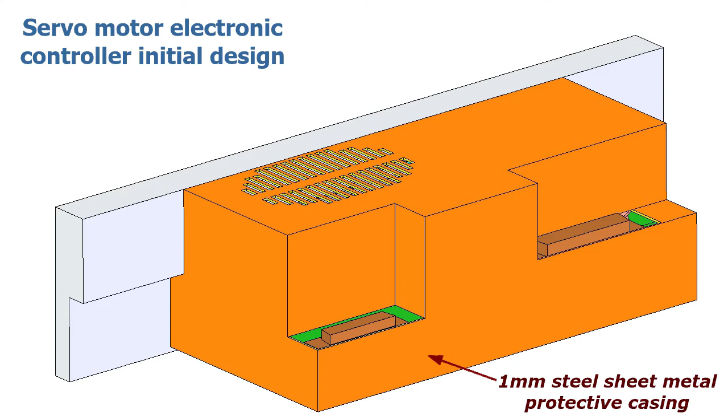The orange protective casing is made of 1mm gauge steel and has air vents on the top and the lower surfaces. In this already simplified model, the two green colored circuit boards, or PCBs for short, are fixed to an aluminum block which acts as a cooler and has mounting points to fix the controller to the mainframe of the machine it is originally built in.

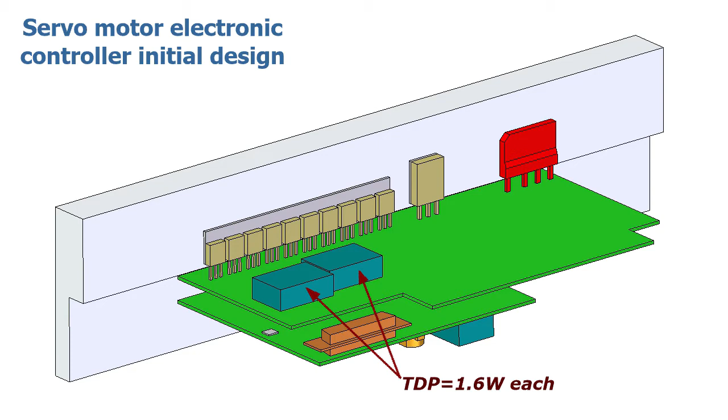As you can see, not all components of the controller work at the same time, but these are the ones that add up the most severe load case. In an electronic thermal management simulation, the key design figure is the heat dissipated by the components, also known as thermal design power, or TDP. This heat has to be removed from the component to keep it below the maximum operating temperature to ensure long life and reliability.

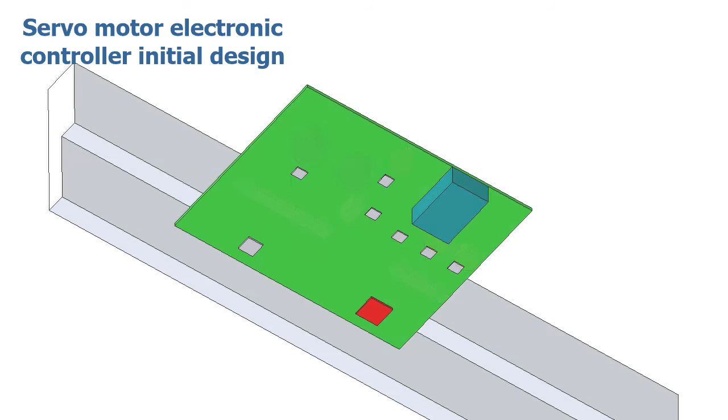No worries if you as a thermal simulation guy don't know the name of all thingies on the PCB or how they work. I don't know all of them in this control unit either. All you need to be aware of are the TDPs and what material each component is made of. For the moment, that's enough.

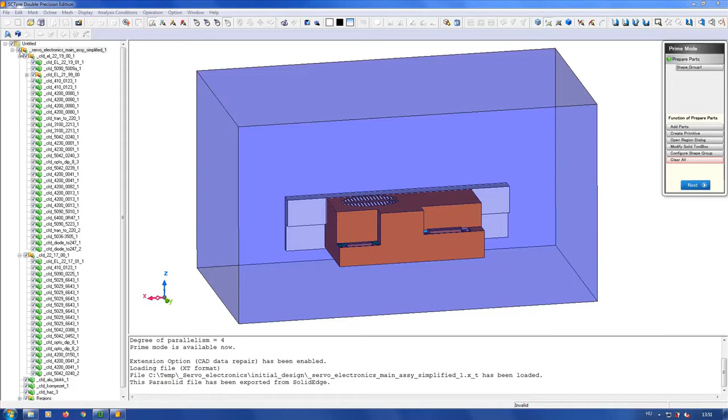Let's prepare the model. The blue box is the air surrounding the controller, and it's an important part of the design because the controller unit works in a quite small compartment without any vents. To make the orange casing suitable for a nice SC Tetra feature, I'm turning the solid parts within SC Tetra preprocessor into a surface model by deleting the internal faces. It would take loads of tiny mesh elements to build the 1mm thick metal, so instead I'm using its outer surface and apply a software feature later on.

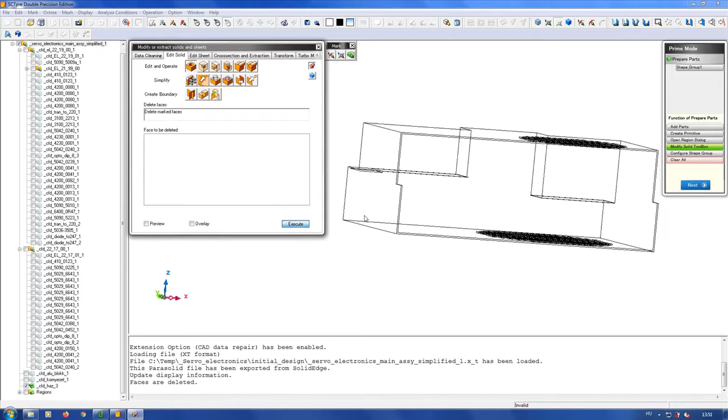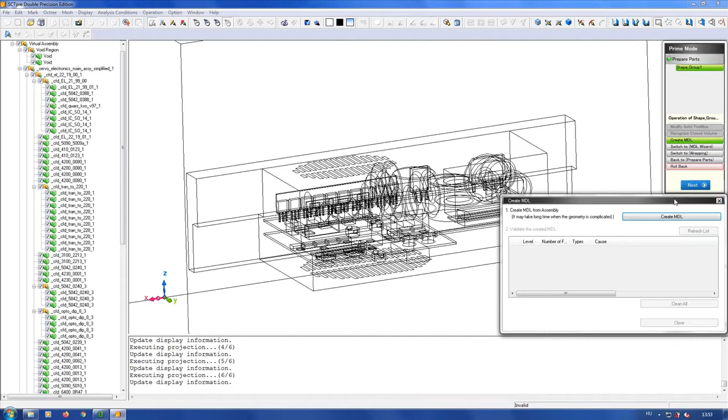When it's done, I'm telling SCT to recognize all solid volumes. This will give us the list of all components with their names, which comes handy in the simulation for assigning TDPs. This is the point when SC Tetra cleans CAD geometry. It automatically fills closed cavities and removes overlaps. Final step of preparation is called tessellation. This means that the parasolid model is converted into one that uses triangle surfaces only. I'm giving it a name, save it and load it for further processing.

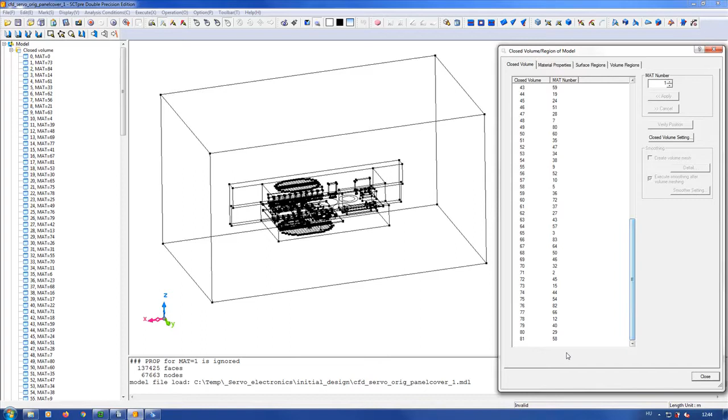At this point comes a little challenge. As you can see, SCT has recognized 81 closed volumes, and this is already a simplified geometry. Additionally, most of the volume region names are part codes the designer used, so they don't really tell me anything about which part is which. It's a challenge because each part has to be given one of the 9 material properties this unit uses.

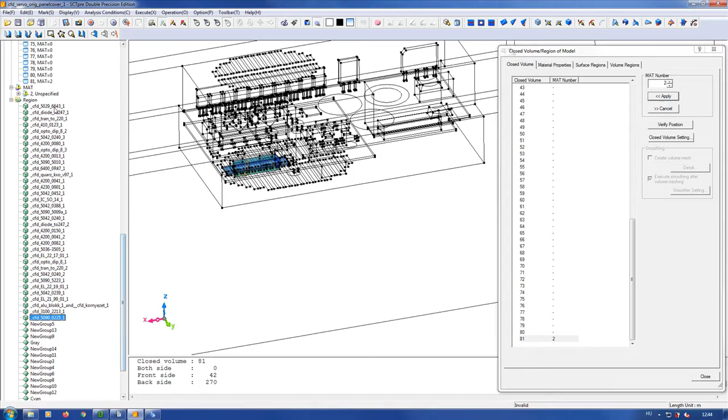I double-click on the volume region name so SCT marks the parts. Next, I make SCT display the volume number of the marked region in the message window at the bottom. For this plug, it's 81. So I go and find 81 in region registration on the right and assign material number 2, which is going to be steel later on. The next region name has 8 microchips in it, so I get their volume number listed, find them in region registration and assign mat number 6, which represents silicon. This way I can assign the right material number to all 81 parts in 10 minutes. I will get back to you when I'm done.

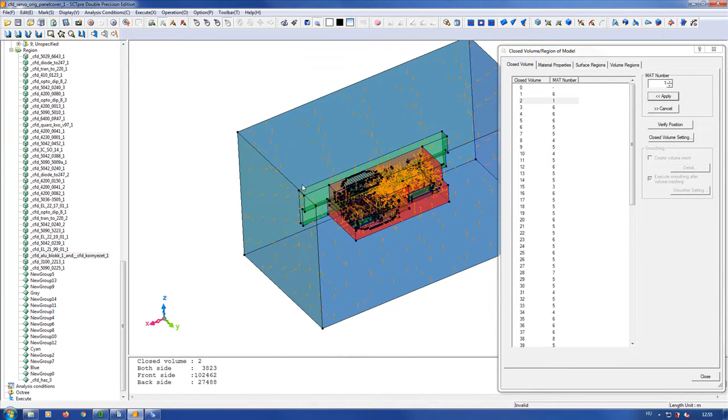As the mat number assignment goes on, it gets easier to find the region number in the registration window, so it's not that bad. If you have a quicker way of doing it in SC Tetra, just let me know.

Let's move on to materials. Out of the 9 different materials, first is convective air to simulate natural convection. Solid parts have steel, aluminum, ferrite, polystyrene materials with constant thermal property values. But silicon, which is the most interesting one for electronics applications, has temperature varying specific heat and conductivity. Apart from these, I will use copper as heat bridge between the aluminum block and parts attached to it, and finally I set printed circuit board materials that have anisotropic conductivity depending on layer orientation.

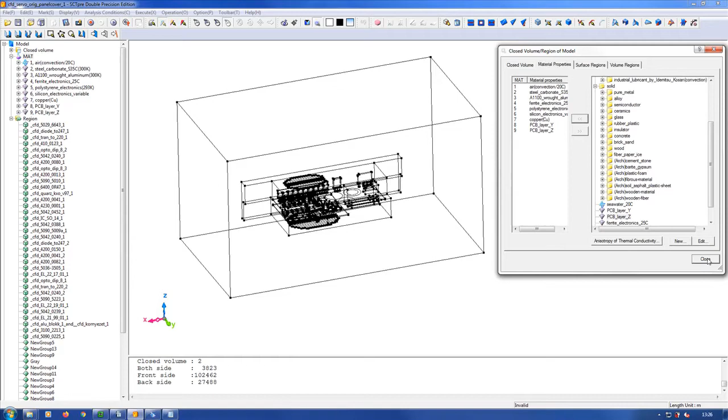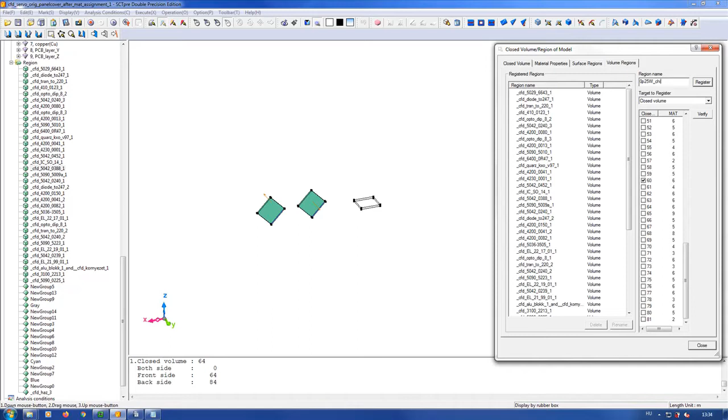Now that I have assigned materials to part groups, the next step is to sort out those individual parts that have heat energy release. As I mentioned earlier, not all the parts work all the time, so I have to find and name those that are on in this load case. I'm using the same workflow as with the material number assignment. I'm marking the part group by clicking on its name, I'm asking for the volume number, and in volume registration I give the volume a name that I finally understand, based on TDP figure and location in the unit.

It takes roughly 10 minutes to find all the parts and properly name them, so I get back to you when I'm done. This is the last silicon chip I'm naming on the upper side of the small board. Its TDP is 0.25 watts.

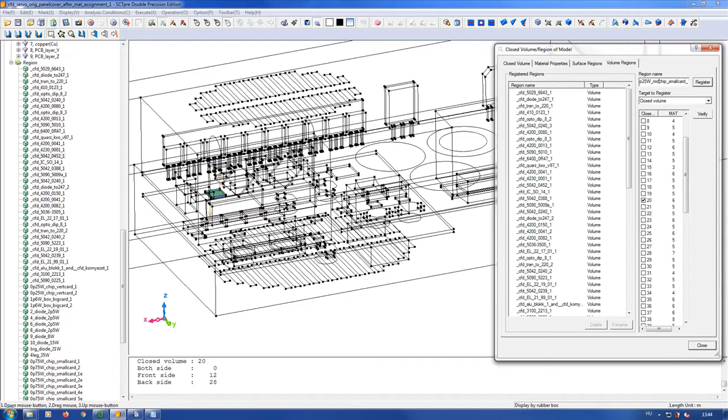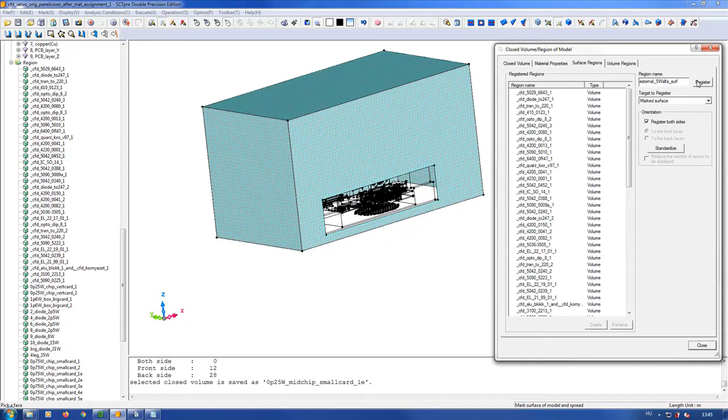Right, I'm done with naming volume regions, but I also need some surfaces of the air compartment to set heat transfer conditions later on. I'm registering top and side surfaces as a group, the bottom surface separately, and finally the outer surface of the aluminum cooling block.

Let's move on to analysis settings and boundary conditions. I'm using laminar flow and switching temperature simulation on. I'm also turning the heat conduction panel feature on, which will allow me to use the surface model of the steel casing. Next, I'm setting 500 iterations and turning gravity on.

Now the heat conduction panel. This is the cool feature I mentioned earlier that saves me a lot of mesh elements. To do this, I'm choosing casing model surface region, giving it 1 mm thickness, and I'm choosing steel as material.

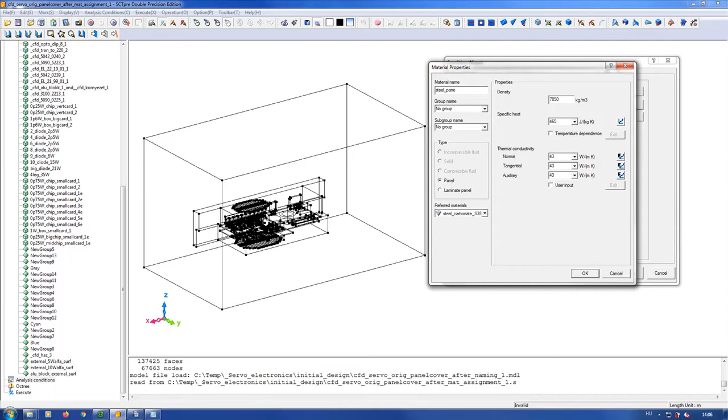Initial condition is 25 degrees C temperature for all materials. Default boundary conditions set up the simulation in general, which saves me some time, and I can further refine boundary conditions in the next step, which deals with surfaces.

I'm setting wall heat transfer coefficient to those surfaces of the closed compartment which are in touch with the environment. The ones surrounded by air get 5 watts per square meter Kelvin at 25 degrees outside temperature, while the bottom that touches another metallic surface gets 10 watts per square meter Kelvin.

Moving on to heat sources, I'm first setting the condition at the outside surface of the aluminum cooling block. It is mounted to the steel frame of the machine, so I'm setting 50 watts per square meter Kelvin at 25 degrees C, which is lower than the expected component temperature, so heat will be removed.

After all this, I'm setting TDPs to volume parts. Their names tell me what TDP I should use, so this goes quite fast.

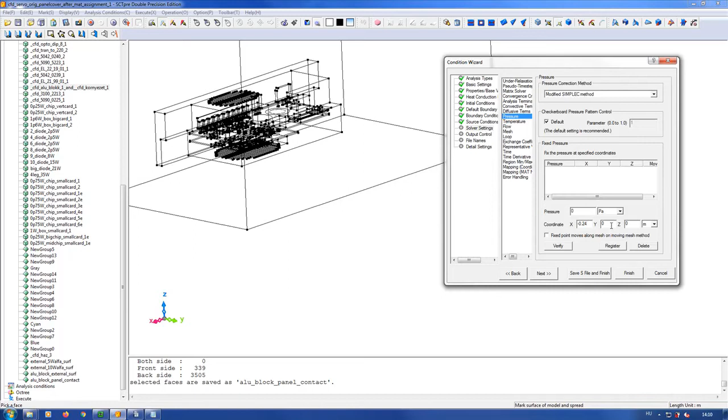Let's jump to solver settings. As the simulation domain is completely closed, I have to show the solver a pressure reference point. For this, I'm defining one in the top corner and setting 0 Pascal static pressure to it.

In output control, I'm clicking all the volumes I have set TDPs to, so that I can have their temperature without any additional manual work, as SCT writes these out in a text file.

Out of curiosity, I also want to have average air velocity in the closed compartment, so I register the volume and ask SCT to write this out into the text file too.

What's left is to set the frequency of automatic saving of results and restart files, and I'm saving all the simulation settings as a text file, which I'm going to use to start a solver.

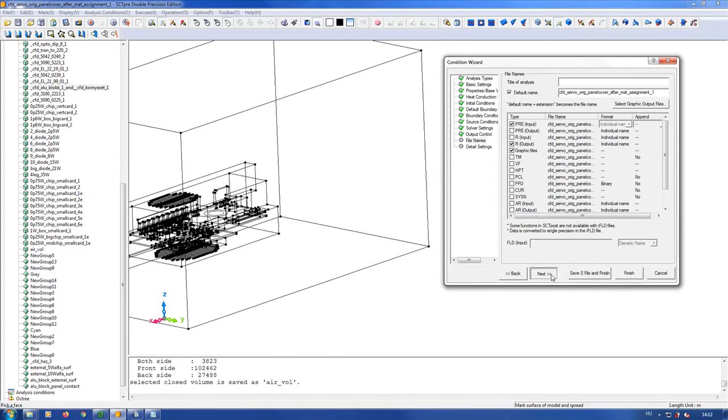Next, I'd like to show you how automatic mesh element size definition goes. I'm generating 5 million elements as a starting point, using 2.5 mm base mesh element size.

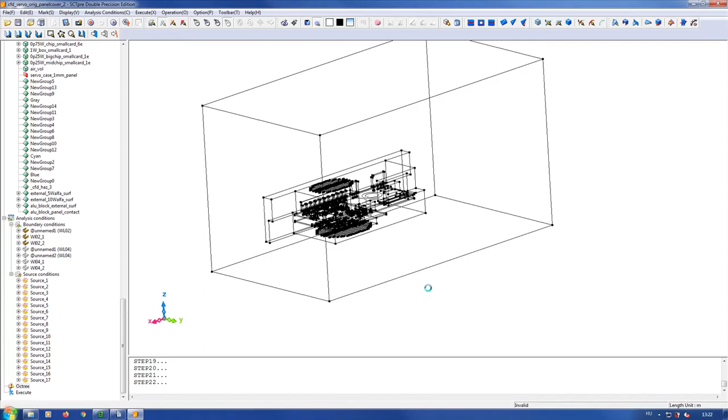Depending on the model dimensions, SCT increases or reduces the base size to fit into the 5 million element limit.

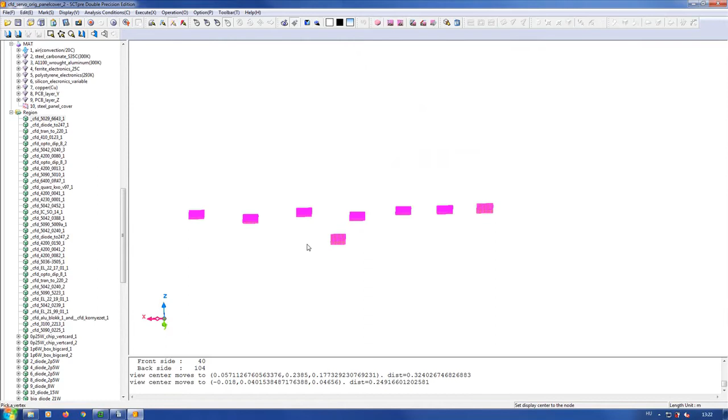I prefer having a uniform element size in parts, and as you can see, the 8 chips have 2 different element size levels. I make SCT show the larger elements, and I'm manually decreasing their size by 1 level.

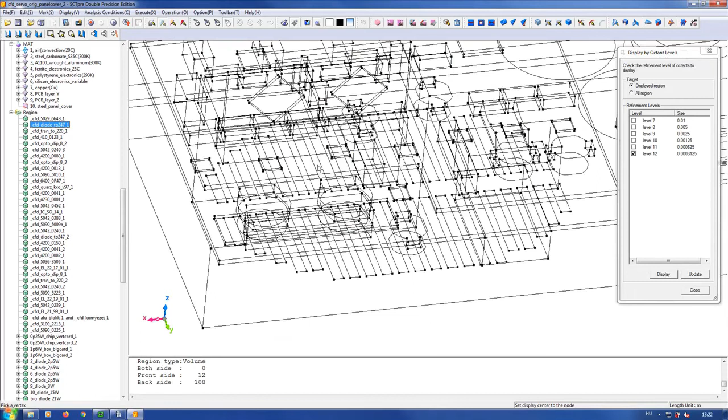I check all parts to make sure the ones that are important and have TDP assigned to them get a uniform mesh size. Due to manual refinement, the system increased the number of mesh elements by 10%, to 5.5 million. However, this isn't the final number, as there will be boundary layers, and depending on geometry, some cubes will be split into tetrahedrons.

To run mesh generation, I need to refer to the tessellated model, the mesh size file, and the settings file. At this point, I tell SCT to keep as many cubes as possible, and I also set the number and thickness of the boundary layers.

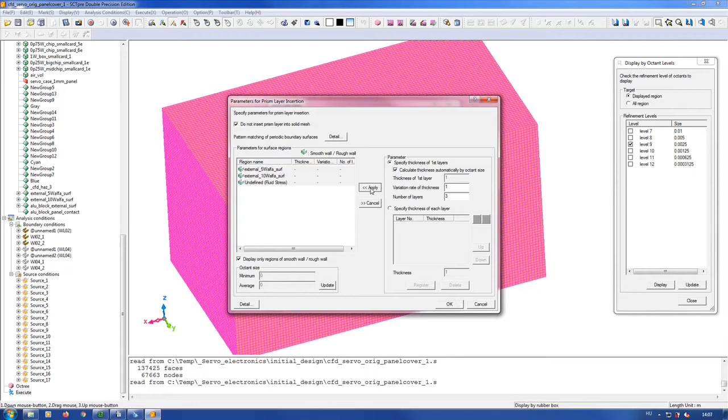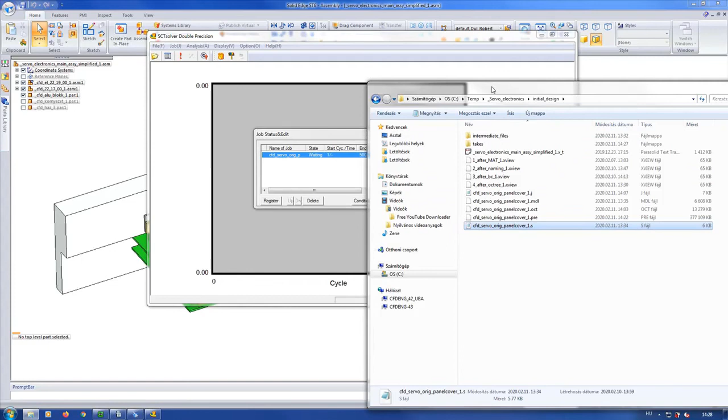After all this preparation work, I can run SC Tetra Solver now. All I have to do is drag and drop the settings file I saved previously. Depending on the computer, it would take some time to finish 500 iterations, but I already have the results ready, so let's jump ahead.

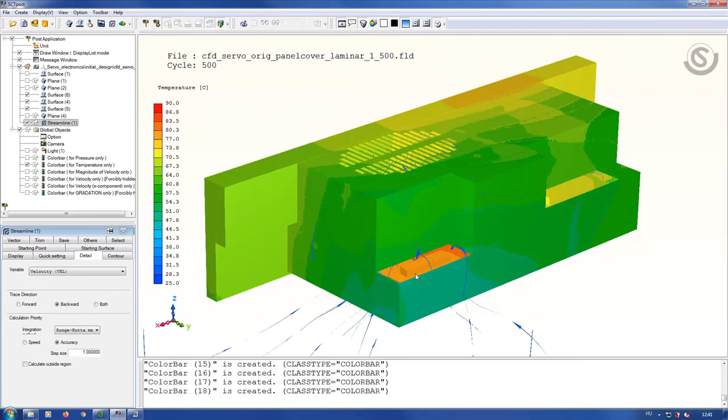As streamlines show, air is leaving the control unit through the upper vents, so there must be air inflow through the lower vents. The top of the scale is unfortunately at 90 degrees C, so it's getting a bit warm in there.

Let's hide the casing. Well, those 2 chips on the tiny vertical board are getting warmer than healthy, and small chips on the lower side of the smaller board must feel uncomfortable too, at 85 plus degrees C.

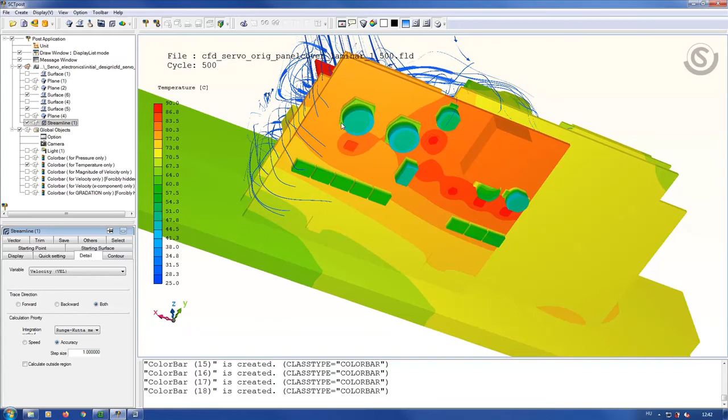Why is it so? The problem is that air warms up to 65 degrees C by the time it gets to the tiny vertical PCB, which means no cold, fresh air gets to the hottest area of the control unit.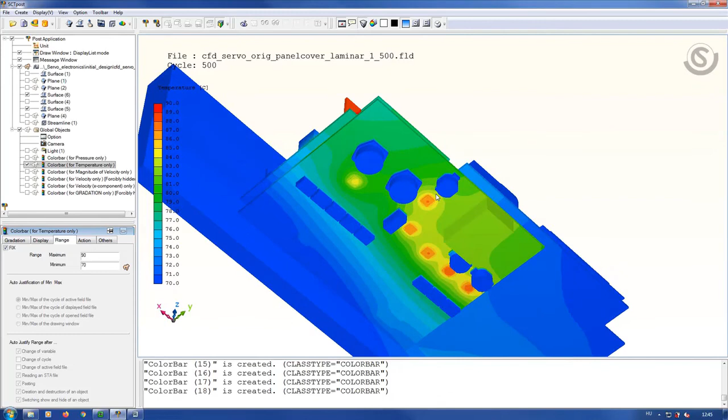When I change the lower end of the temperature scale to 70, it's clear that chips on the tiny PCB are between 89 and 90 degrees C, and smaller chips at the bottom are around 85 degrees C.

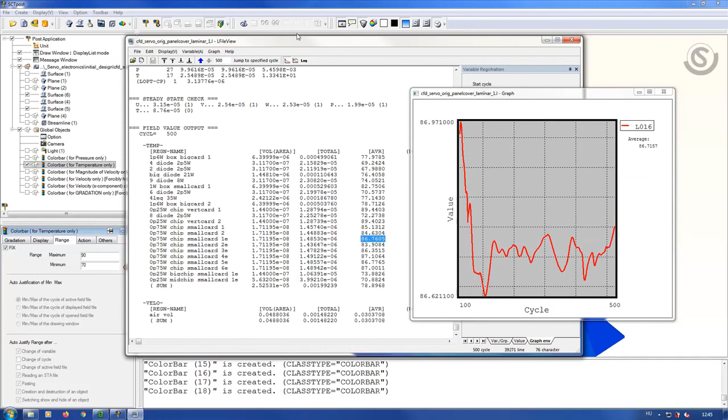The results text file shows the exact numbers. Small chips are between 84 and 87 degrees C. Bigger ones on the vertical PCB are between 89.4 and 90.4 degrees C. The ideal would be 60.

If we don't want to burn all these components to ashes, we have to change the ventilation system, and I guess some heat sinks would also be beneficial.

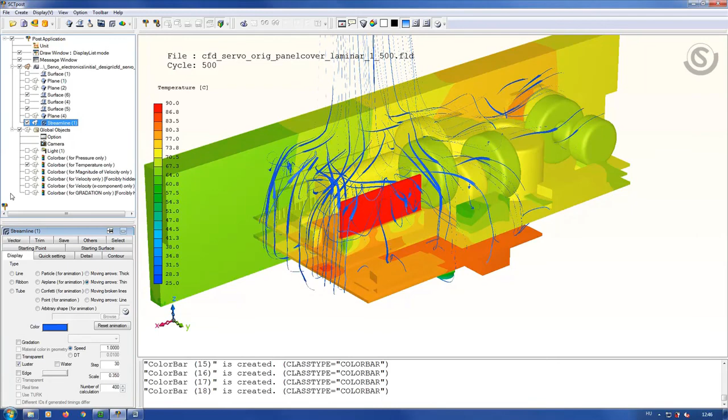In the next episode I will show you what I would do to improve the situation.